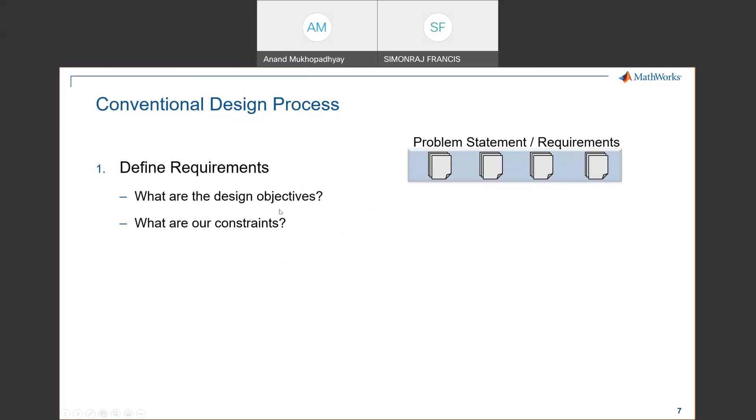Whenever we need to design a system, we need to understand the problem statement and the requirements. So we need to define those requirements: what are the design objectives and what are the constraints involved in that. That is the first step.

Once we know that, we have to identify for that system what are the different physical components required, whether it's a purely mechanical system, a purely electrical system, a control system, or a combination of all three, requiring embedded software as well. If it has to be deployed in some embedded hardware, it may need all four of these components.

So that has to be understood, and the problem has to be subdivided into electrical, control, and software, and finally it has to be integrated all together. This is known as system integration. The sub-modules are created, we have to integrate and test it, and only after proper test results can we finally deploy it, or make the system into actual hardware.

So obviously there are multiple challenges here. Whenever we are talking about the system, first of all, in the first stage, it is difficult to analyze or very easy to misinterpret. So understanding the problem statement itself is a challenge, and you need to understand it correctly. The clearer you are in the first step, the easier it will become in later steps. Otherwise, you have to come back and redefine the problem. So it is very important.

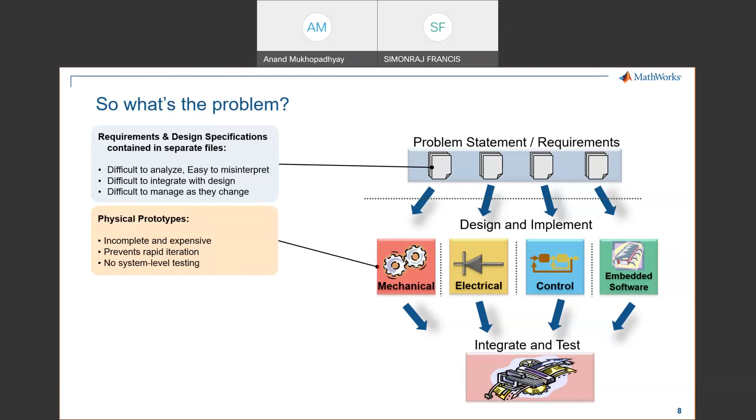If we are not clear, if the design is new, we don't know whether this will work or not. So building the things all together and testing it will need multiple iterations, so it will become obviously difficult.

And similarly, the manual coding aspect. Once you have designed your system, you have to put the system in the form of embedded software into some embedded device. So you need to understand or translate that design into that particular coding style, and that itself is time consuming. If that can be avoided, that is another good thing - how we can reduce this manual coding time, and which is reliable also. The coding should also be reliable, it is not that it is just generating a code which may not work. It could work better than the manual coding thing. So these are the things to consider.

And then coming to traditional testing. The first point mentioned here is that design and integration issues are found late, and it's difficult to feed insights back into the design process, and there's no traceability. This is a very common thing in industry. Once the design is made completely, you cannot simply sell it or terminate a product which is ready to be placed in the market, but you have to test or do test trials, and during that testing you will find multiple errors which need to be resolved before actually sending it as a product.

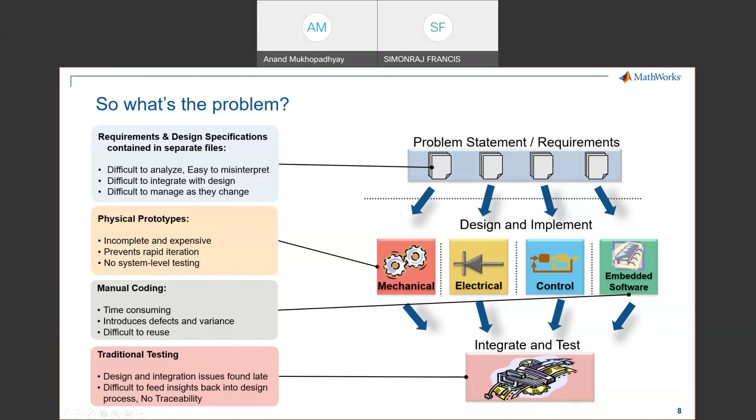Tracing the error will become challenging once the entire system is made. Maybe you are able to see the error, but what is the cause of that error? To detect that becomes a very challenging task. It can be in any of the stages from the beginning itself - whether there is some error in the mechanical part or in the control part or some misinterpretation from the problem statement to the design stage. So the cause can be anything. Understanding that itself is challenging, and once you understand that, you have to again go back and go through these steps, and check again where you may find some other problem. So this overall procedure is quite challenging and tedious.

That is why requirement errors are most expensive to fix during testing. Now in this graph you will be able to see what are the different phases of a project. First is the requirement phase, where we are listing down the requirements of a project or requirements of a system that is to be made. So suppose we have this amount of error.

In the requirement phase, we are able to identify the different errors introduced, and this shows the relative cost to fix that error at this first stage.

Now, if we go to the next stage, the design phase, we will have two kinds of errors: not only errors in this particular design phase, but pre-existing errors which may migrate to this phase as well. Now we have to fix both.

Now, if we see here, the amount of time or cost required to solve those requirement phase errors is much more compared to the errors arising in that particular phase.

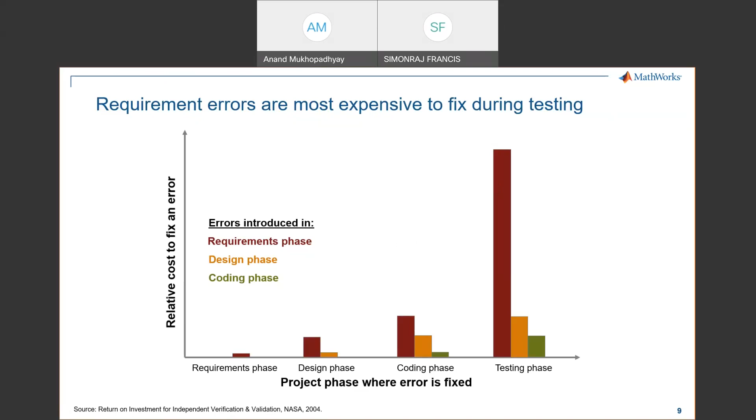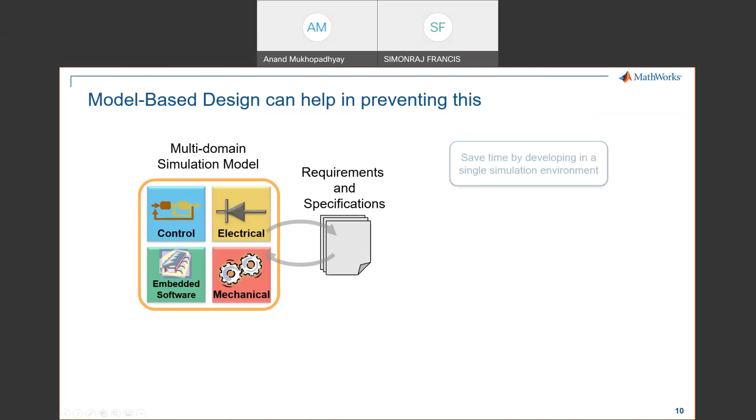Now, how can model-based design help in preventing this? In case of model-based design, you are able to save time by developing in a single simulation environment.

So by model-based design, what we mean here is that you are actually not making the system, but simulating the entire system inside the software. Here, correcting those errors is much easier compared to correcting errors while designing your system. So that is the concept here.

So once you have made the system, which needs different components and different physical aspects, and simulated the entire system, you can iterate it multiple times in the simulation software itself, and once it is giving good performance, then you go for the deployment aspect. That is the main concept here of model-based design.

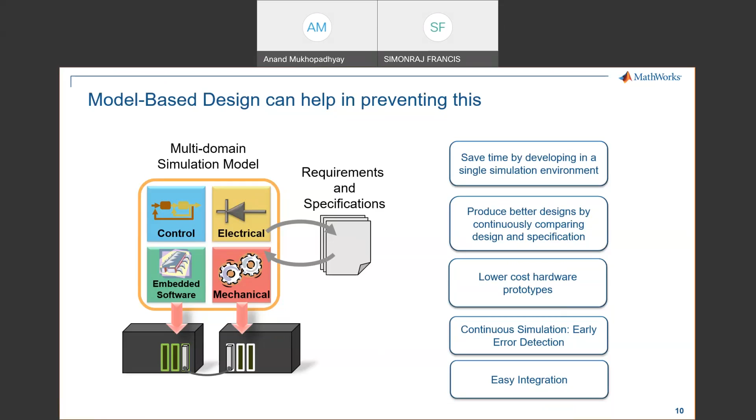One second. Yeah, sorry about that.

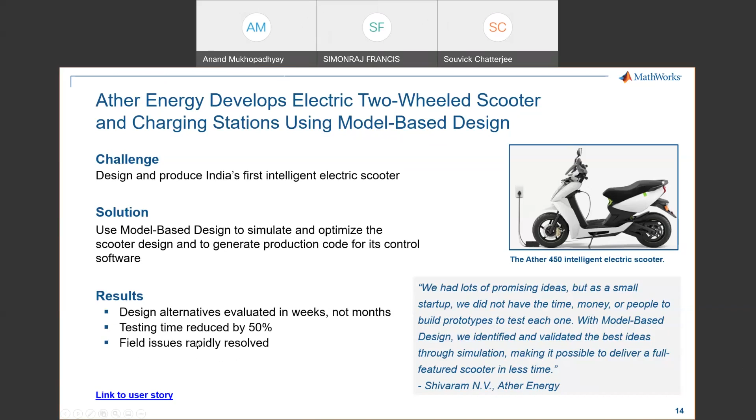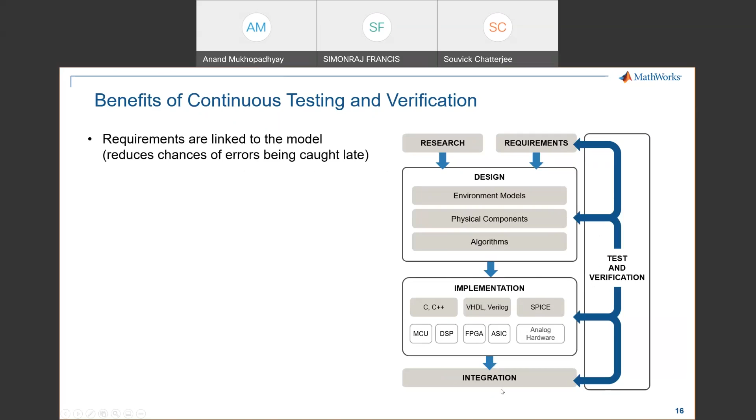So why were these industries successful? The benefits of continuous testing and verification. This is a similar workflow to what I covered in the previous slide. First is the requirement phase, then the design phase, then implementation, and then integration phase. The only difference here is these sub-modules showing what happens inside each phase, and all phases share a common element known as test and verification. After the first phase, second, third, or fourth phase, we have to test, verify, and find errors. If the errors are from a previous stage, we have to go back, and this is how we keep iterating before final deployment.

We have domain-specific details added to refine the model, and intellectual property and engineering data reused from existing designs and CAE tools, computer-aided engineering tools. In the design phase, we have different environment models, different physical components, and algorithms involved. We need to design those sub-modules, whether related to mechanical, electrical, controls, or some other domain, and combine whatever algorithms are required all together. This is a very important stage, the second stage, the design stage.

Coming to the implementation stage, when we have the design ready, we have to understand what kind of hardware is needed - it could be a microcontroller unit, a DSP processor, FPGA or ASIC device, or analog hardware. Each different hardware is compatible with different kinds of code: microcontroller and DSP are compatible with C++, FPGA and ASIC are compatible with HDL, VHDL or Verilog code. Similarly, analog hardware uses SPICE-based coding. So the block diagram based system has to be converted to that, then we can deploy it into the hardware and do the integration part.

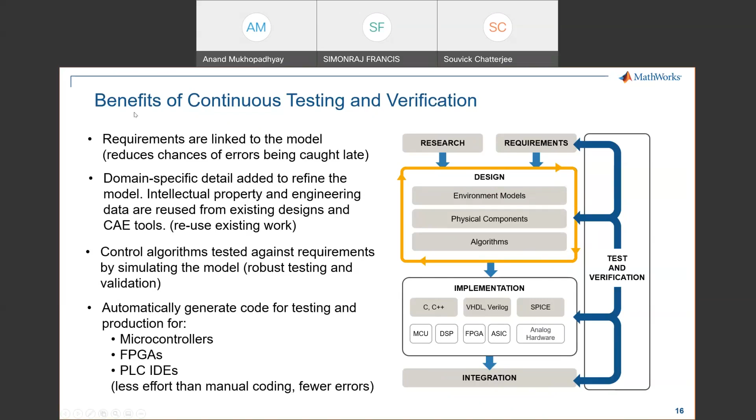This saves a lot of time in manual coding as well. In this phase also we have less effort than manual coding, because it is done mostly by the tool, and there are fewer errors in the workflow. Even after the implementation stage, we can always go back and redo the process, just by changing some blocks after finding errors, and rerunning the code generation phase and integrating it again. Overall, it will save a lot of time for test verification as well. These are the general benefits of continuous testing and verification.

Now I will start with some simple demo, and I see Souvick has also joined. After a while, I will also ask him to cover some of the demos related to Simulink to get started. So this is a basic session.

Let me open the Matlab window. Calculus blocks - let me open this one. I hope my Matlab window is visible to all. Yes, visible. Okay, thank you. So this is an example to show how we can use Simulink for some simple mathematical operations like differentiation or integration.

This is a Simulink environment where let me show you from the Matlab window itself. Inside the Matlab window, we have this Simulink block. If we go here, another dialog box will open up, from where we can create a blank model, or there are some specific block sets or toolboxes related to those domains. We can start with those as well, but for now let me just show you.

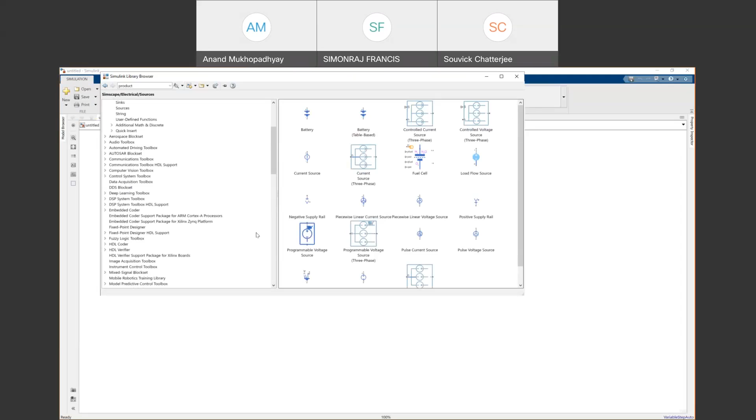If you open a blank model, you will get a blank template kind of thing, and you have this library browser. Inside the library browser, you have multiple sections like Simulink, or similar to that shown earlier, like aerospace block sets - blocks related to aerospace would be found here, blocks related to DSP would be found here. So similarly, it is divided.

Also, we have a special section here known as Simscape, we'll get into that as well, which is used to simulate different physical components like electrical, fluids, or multi-body - a bit advanced topic for now, but these things can be done here apart from the foundation library. Inside the foundation library you can find the subgroups as listed here, and you'll find related components - electrical components will be found inside this section, and the different sensors - whether we need a voltage sensor and current sensor, or what are the different sources, if it's a voltage source, AC current source, or whatever sources may be.

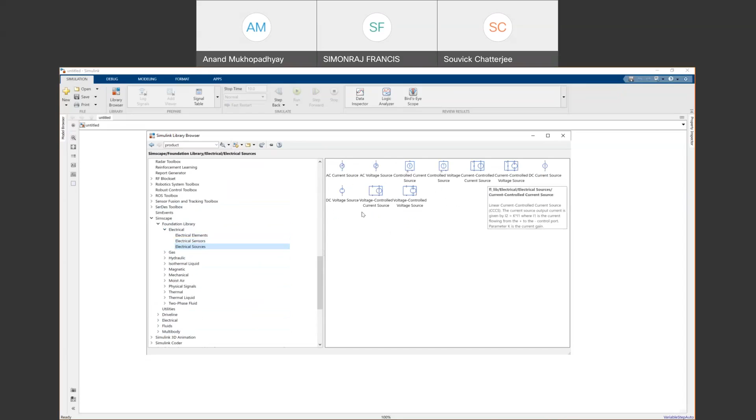So those will be found here. Similarly, inside mechanical you will have these subblocks where you can find these things. Okay, and you have to just connect those blocks to make the design.

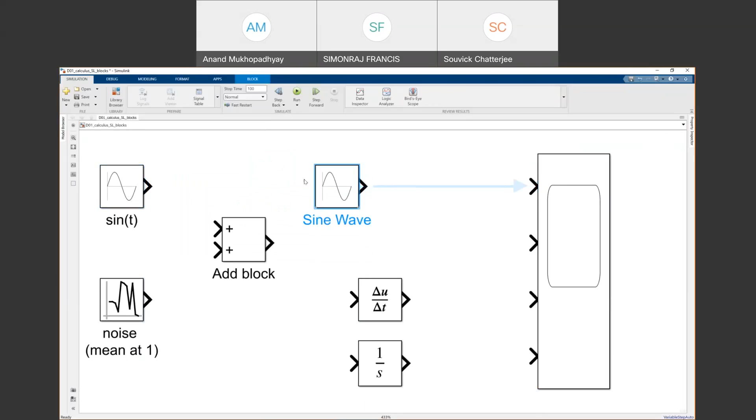Now coming back to that simple example, here we have taken a sine wave. You can see, if I click in this block, this is a sine wave. Also the block name here, and you can click on it to get the block here, or else you can go to the library browser, and since it is a kind of source, you have to go to sources and see what kind of sources are available.

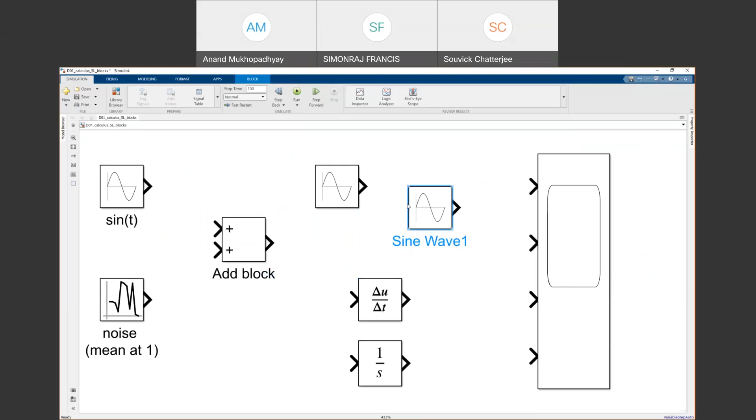So there are multiple things available, out of which, suppose this is the sine wave, so I can either drag and drop, or I can also double click or right click and add it to the environment. Right click and add it to here. So these are multiple ways we can add these blocks.

So now I have 2 more sine waves which I actually don't require. Once you have this block, you have to double click and see what are different properties and set here. For instance, a sine wave will have some kind of amplitude and frequency. Also, phase and bias are also there with a sampling time. So as of now, we can see here the amplitude and frequency time is set. We are not providing anything else.

So if we don't provide any sample time here, then it will interpret the sample time from the other blocks which are connected. For instance, this is another block known as noise, which is actually a random number generator. Basically, if I type random, then I will get the second one, the random number generator.

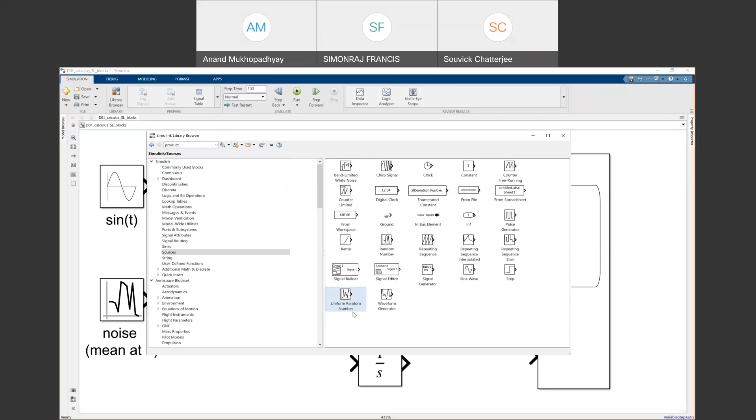So this is one way when you know the name of the block. If you don't know the name of the block, then similarly you have to just find out the correct category for it. Like it will be under sources, and under sources you have to find, suppose this is the random generator, so this is the same block. Or if you want some other block like uniform random generator, you can do that, which will have some differences as mentioned in each of those blocks.

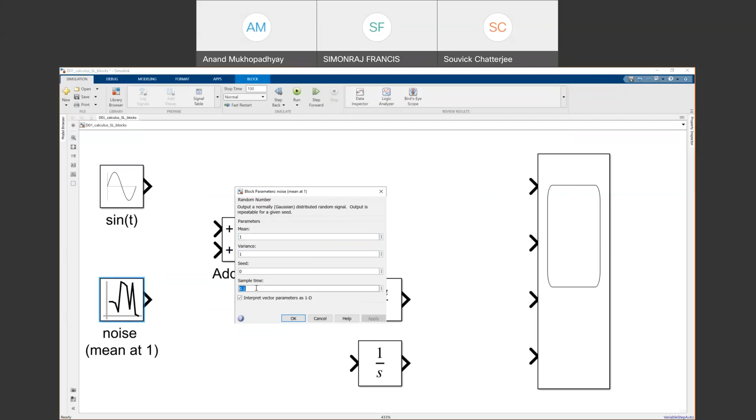So you have to just go to the block and read what kind of thing it performs. It will output a normally Gaussian distributed random signal, and the output is repeatable for a given seed. We have the mean and variance. Whenever we are generating some Gaussian distribution, there will be variance, standard deviation. So mean 1, variance 1 is fixed with a sampling time of 0.1.

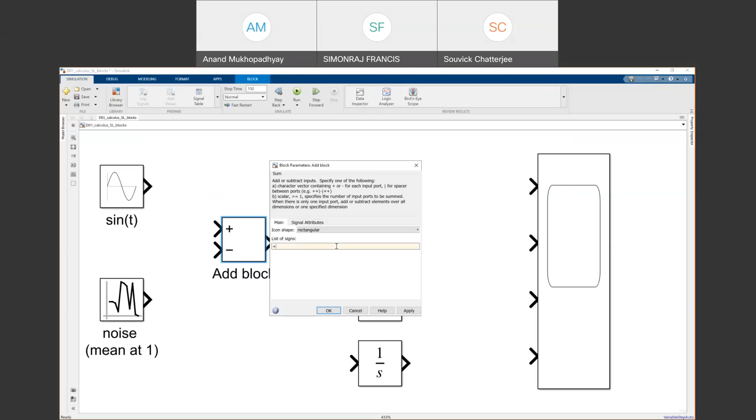Next is an add block. This is an adder block where we have put 2 signals to add, so that we can also make it a subtractor block just by changing the signs here.

And now we have this derivative block, which will do the differentiation. It's a numerical derivative, du dt. So with respect to time, it will derivate the signal.

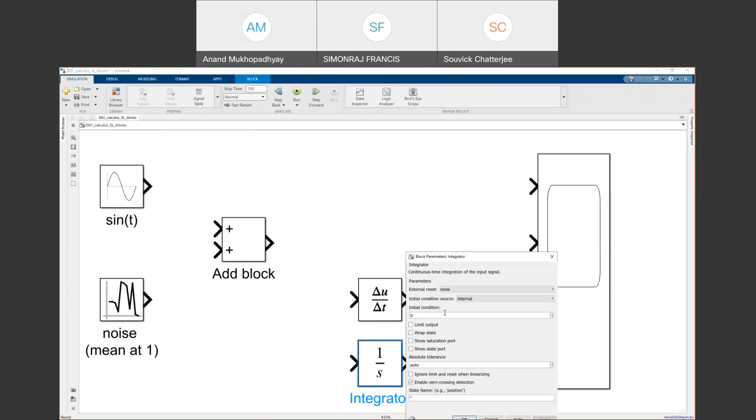And we have this integrator block as well. There are settings associated with it as well, and it will do the integration of that particular signal.

So now we have the blocks ready. The final block I just didn't mention is a scope, similar to the input portion. Here we want to see the output waveform into some kind of oscilloscope, so that is what this block is doing.

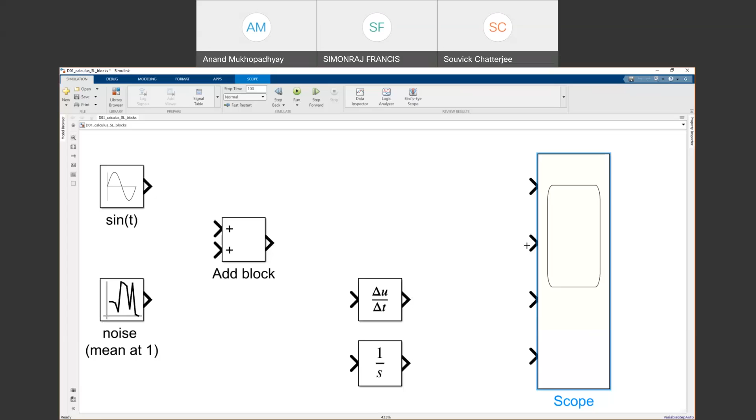So if I double click on this block, you will be able to see the output waveform window, where we can see those waveforms. There are four windows here, because there are four inputs mentioned here.

Now let me connect these blocks. I'm just connecting the input to the add block, that will add the sinusoidal wave and the noise together, and we will have a resultant wave here.

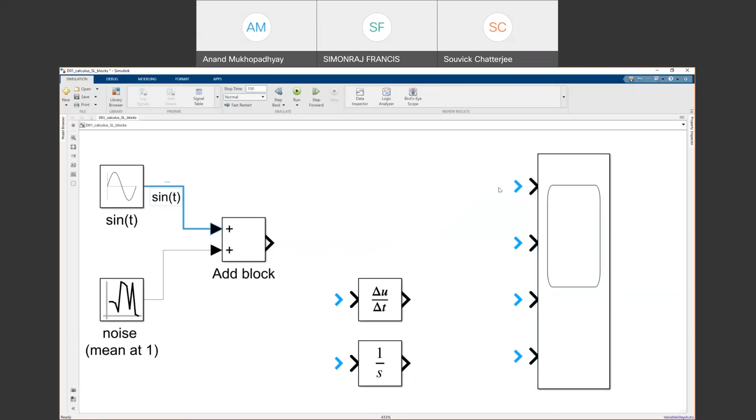So maybe I can simply connect the sine wave here, connect the noisy sine wave here. And send this noisy sine wave to this derivative block, and I want to see the result after derivation, what happens to that noisy sine wave. Similarly, sending it to an integrator, and I want to see the result after integration of that sine wave.

Having connected the blocks, I can use this simulate model icon, which is also the run icon. I'm just simulating it, or I can also type Control T. It will do the same thing.

After simulating this till 100 seconds, I can see the x-axis from 0 to 100, and these are the four waves. The first one is the sinusoidal wave, and the second is the noisy sine wave. After addition of that random number generator and after differentiation, we see this is the response of the wave, and after integration, the response is something like this. So this is one way to visualize it.

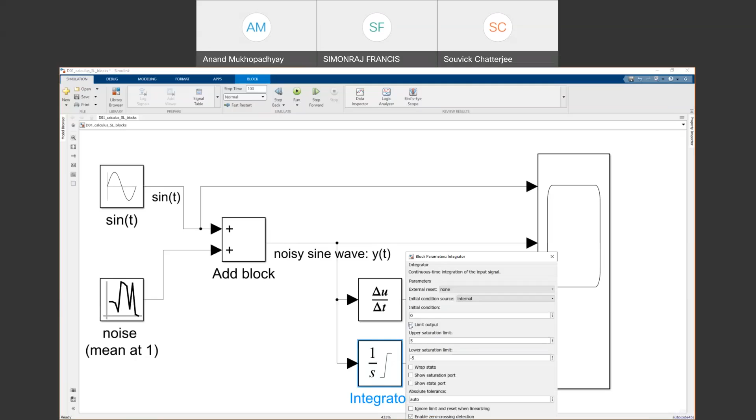Now there is a different symbol also here. Once I put this limit in that integration, but once I remove it, it is just the 1/s operator used in the Laplace domain. Now you see it is integrating, but the magnitude is increasing. It is integrating all the signals starting from 0 over time.

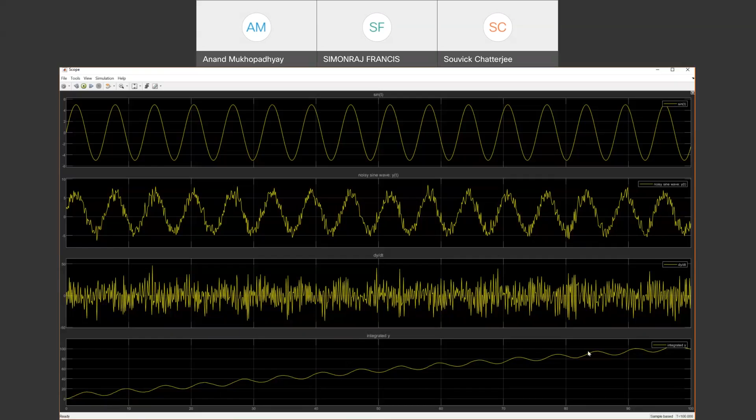The x-axis is the time axis. One thing I didn't mention is there are multiple solvers behind Simulink, so how is it solving with respect to time? This one has chosen the ODE45 solver. If I open the solver settings, I can see there are different ways to select the solver, either variable step or fixed step. For now we have chosen variable step, and inside variable step we have chosen automatic solver selection, so the simulation tool decides whichever solver is best for the problem. In this case it chose ODE45 in the background.

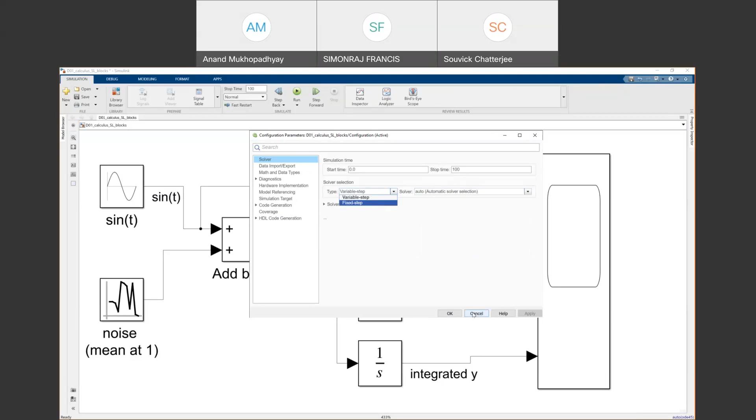There are other solvers as well, but this setting can also be found from here, which is very important to know. From the modeling section, you have to go to model settings, where you can make those changes as well. So does that answer your question?

Anand sir, actually the 1/s, is it the Laplace transform of a function f(t) equal to 1? What is the relation here? You have mentioned du/dt for derivative, which means you are doing differentiation of this sine wave, and that corresponding change is impacted here. Here you are taking the Laplace transformation of sine t, but the Laplace transformation of sine t is 1/(s squared plus 1) actually. What do you mean by 1/s here?

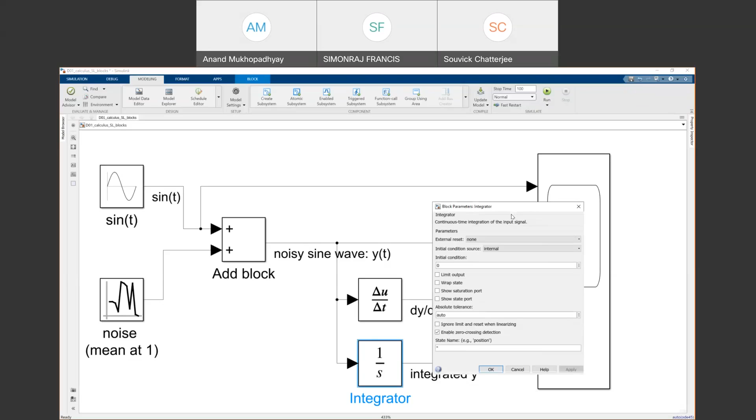Here actually the function is if f is 1, then this is the corresponding transform. If you take a function sine t, then the corresponding Laplace transform is 1/(s squared plus 1). This 1/s symbol is just representing its Laplace transform, or it takes the corresponding Laplace transform of sine t.

So this 1 by s, this is actually an integrator block, denoted with this 1 by s thing. Maybe it may be an integration of sine t. Let me explain it this way. Inside this continuous block domain, we have different mathematical operations we can perform, right? One is this derivative and one is this integrator. So I'm using this integrator block, which is also denoted by 1 by s, and usually in Laplace domain we see this transfer function written with this term s. So it is actually integrating it with respect to time, and then we are plotting it with respect to time. That is being done here.

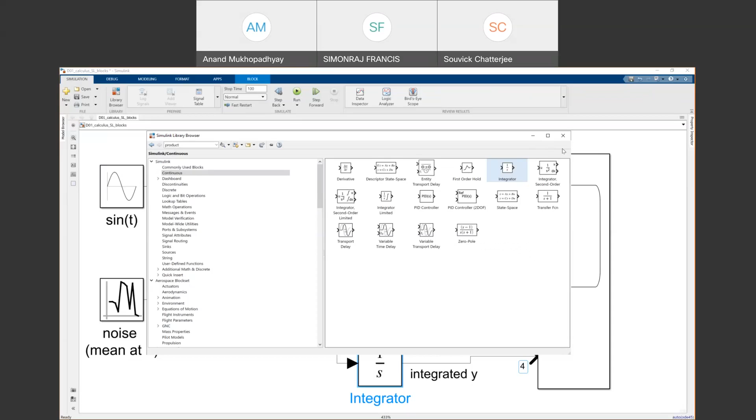Okay, sir. Okay, thank you. Okay, thank you, sir.

So now let me go to the second demo. So now in the second demo, we already have the blocks which we require.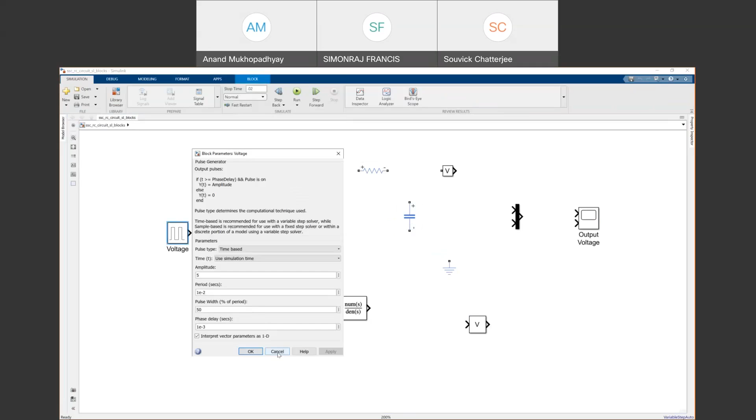We will be going through an RC circuit, and we will try to simulate it using the Simulink blocks, with the mathematical blocks available, and also using physical components like resistor and capacitor available in the Simscape block. We have these blocks already taken from the library like pulse generator, a voltage source made of this controlled voltage source, and a solver configuration.

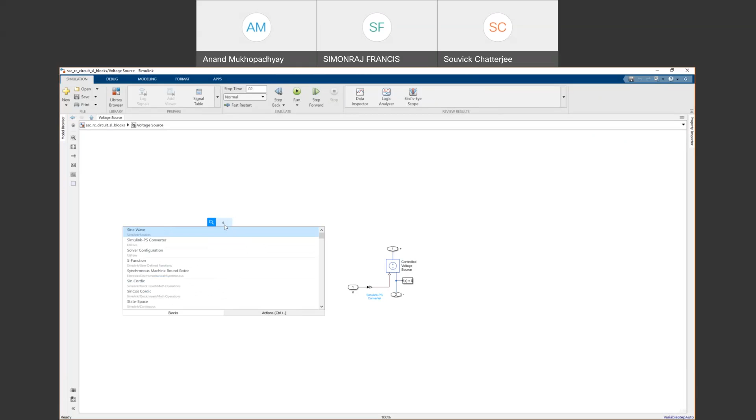So these are things which have to be mentioned. We are dealing with Simscape. So whenever we are connecting Simulink and the Simscape block, we need these kind of connectors known as PS to Simulink to PS converter. So Simulink to PS converter is one, another is PS to Simulink - physical system to Simulink converter and Simulink to physical system converter. So this is what is used here. This is a Simulink block, and we want to convert it, so they're using this.

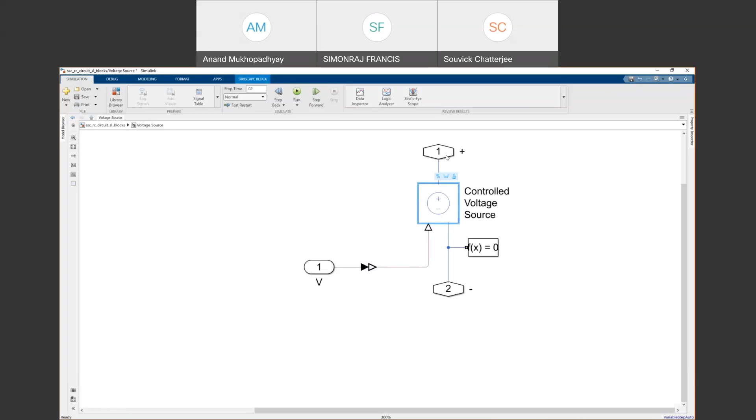Let me just zoom it a bit. We are using the Simulink to PS converter, then we are in this block. This is from the physical domain, from the electrical sources section that I had shown earlier, and similarly these are the ports from the Simscape block. So this is a connection that is required, so you have to just remember this important thing. The rest of the things are more or less okay.

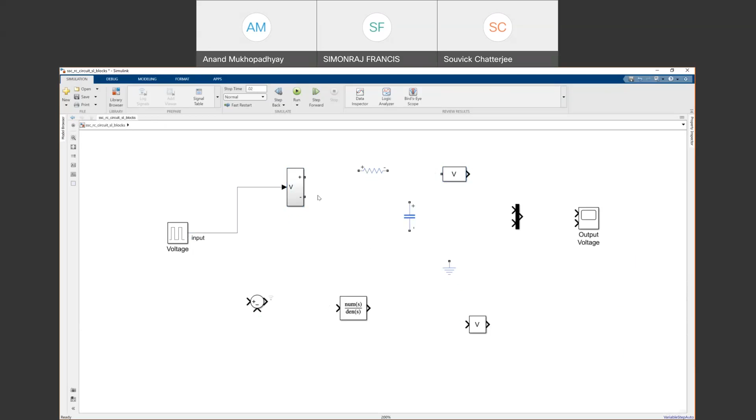Now, for making the connection, let me make it quick because we may run out of time. Let me just quickly connect it. I'm connecting this voltage source to this resistor, and then connecting this resistor to this capacitor, and there is this ground component which is the electrical reference. So even if you are using some other component, you will need this reference. This is important, and I want to complete the circuit. So I'm using the negative port - here we have these two positive and negative ports as you have seen earlier, assigned with these numbers.

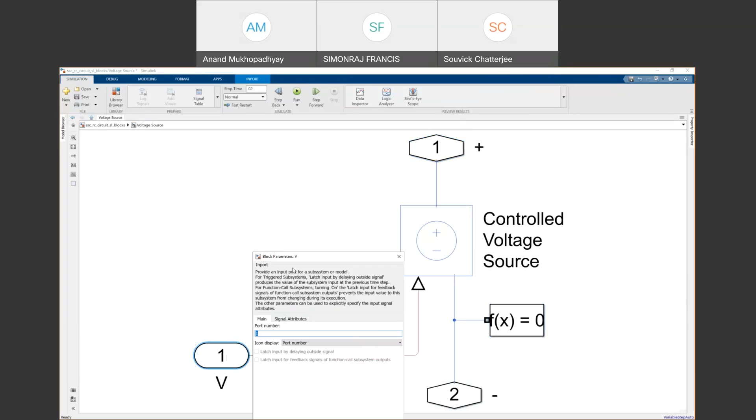PMC port - physical modeling connection port, again related to Simscape. So these three blocks are related to Simscape, which will need the solver configuration, and to connect it use a convert block with a Simulink port. So this is a normal port, in port Simulink. This is the details of this voltage source.

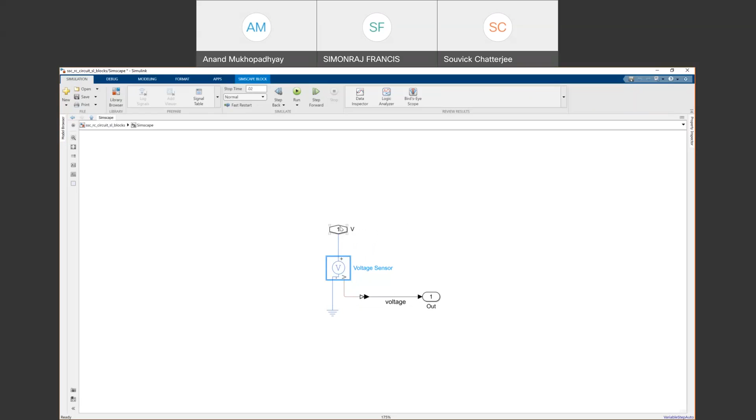I just went inside it, and now I'm back just to show you how we are connecting this Simulink with the physical components. Second, I can connect it to this voltage sensor. This time we need to sense the voltage, for that we need a kind of sensor which is again a physical component taken from Simscape. In a similar manner, we are just connecting, completing the sensor terminals with the reference as well as the ports with a physical PS to Simulink block to the output port. That's it, so now we can use this sensor and connect it further.

Here we are using a MUX. I will tell you why we are using a mux - we want to compare the result of the Simscape with the result of Simulink. We have not made the RC circuit using Simulink yet, but we can do it in this manner. So let me just connect it here, and I'm connecting it here, and I'm connecting it here.

Now here we have this transfer function block. Inside the transfer function, you have to mention the actual transfer function based on the numerator and denominator coefficients. Because this is an RC circuit, if you solve V naught by Vi, the numerator will have 1, and the denominator will have the RC term associated with S.

You have to mention these terms where the first term corresponds to S to the highest power. So here RCS will be the term in the denominator, so you write RC. Then we don't have any other term, so we mention 1. That's it - mentioning that transfer function and connecting it to the output port.

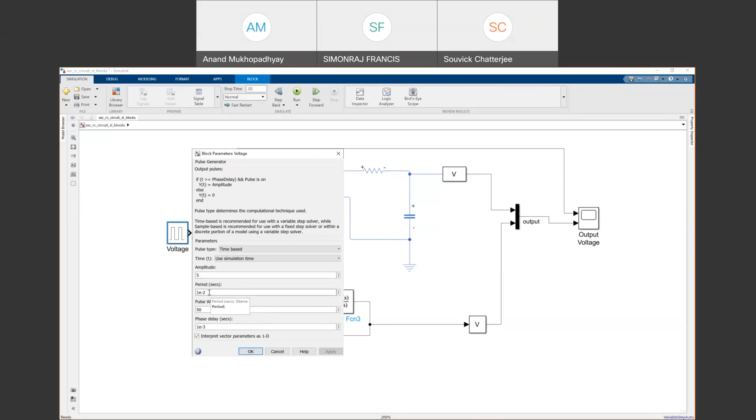So I'm connecting it to the input, where this time the input is a pulse generator, having a pulse width of 50% and equal time period. These are the amplitude and other settings like the time period of pulse and the phase delay. That's it.

What does the RC circuit do? It is charging whenever it gets a higher pulse. When the voltage is reduced, it is discharging again. So charging and discharging based on the time constant, which depends on the R and C value. Now you must be asking, we didn't define R and C value anywhere, right?

That you need to define either before running this program in the MATLAB window, or again as I mentioned, in this modeling part. Here we have modeling properties where you can go to the callback section and mention those MATLAB commands, like R and C values - R equals to some ohm and C equals to 100 microfarad. If you mention this, whenever you are loading the file, it will automatically run R and C in the background, and it will be loaded here. Otherwise, you will just get an error asking you to mention the value of R and C.

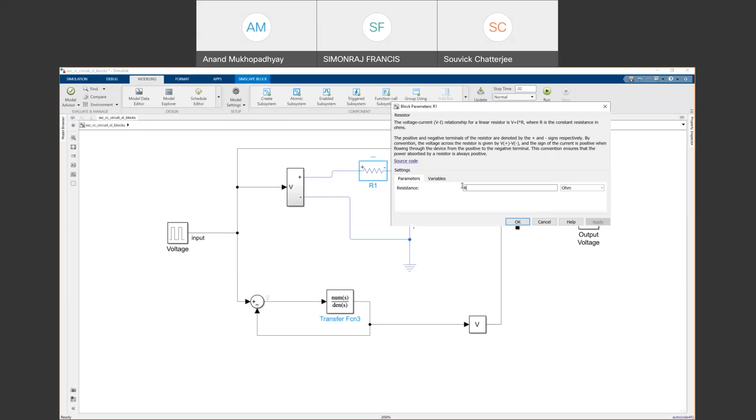And why R? Because the variable here is named R. If you change the name here, you have to assign it to that particular variable. So this is how you can build a particular circuit using Simscape and Simulink in the electrical domain.

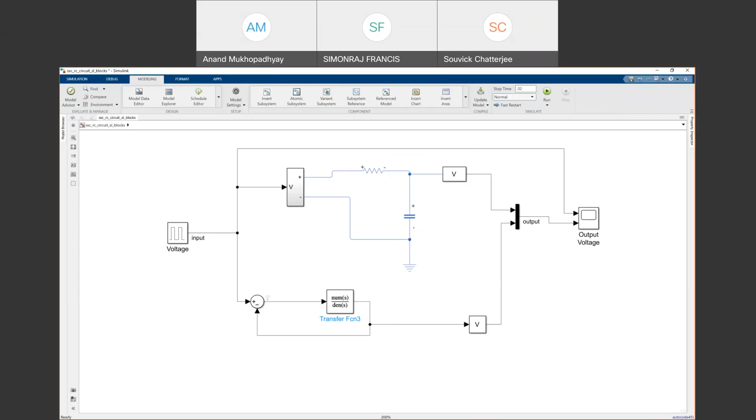Let me go back to the slide, and let me briefly do another thing about Simulink. When you are dealing with multiple hardware, you would need to install some of the support packages related to those hardware devices. For that you have to use this add-on section.

Whenever you are working with some hardware, for instance, if you are working with your mobile phone and want to connect your Android device and do some kind of experimentation with the Simulink environment, you have to install the support package for the Android device, from this add-on section. Then you can do multiple things.

Here you can go through these links to get through these examples to get started, where we are using the blocks from the Android section in the library. So this is a camera block and this is the display block, which will read the data from your camera, which is your mobile hardware, and send it back from the Simulink environment, back to the display.

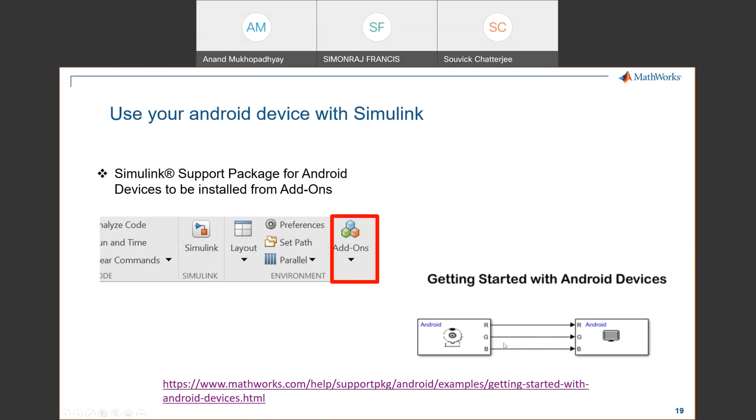So here we are not doing any operation - it is a straightforward thing just to test that you have installed it correctly. After that, you can do multiple experiments. One such experiment is shown here, where you have made some computation in between.

What is the computation? It is very simple. This camera, which is capturing the video in real time, will have red, green, and blue components. We are sending those components, and we are also sending a 255 number.

So if you know about images, you know images are pictures which vary from 0 to 255 if it is in uint8 format. So we are just subtracting 255 with this value, and this kind of operation will actually invert it.

So if you are capturing something of black color, after this operation you will see it as white color. This operation takes place inside the Simulink environment, and then sends it back to your hardware device. For that, you just select deploy to hardware, and you will be able to see it.

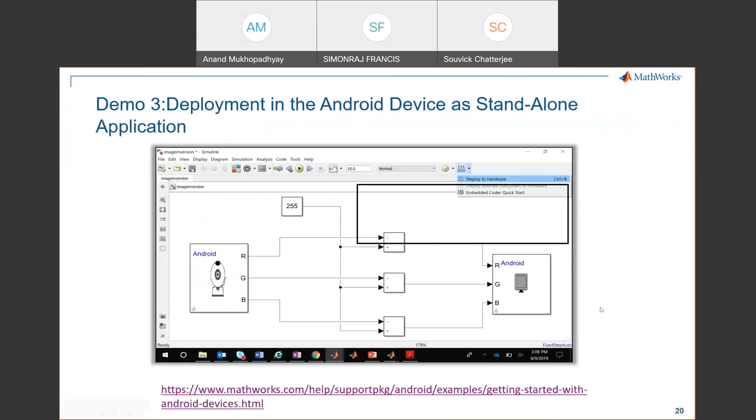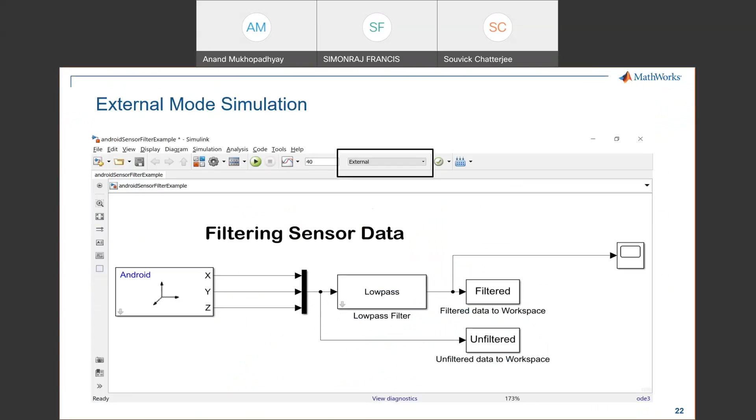At a later stage, but now I will go back to the slides. So these are different filtering examples you can do, because your Android device also has sensors apart from your camera. So you have your accelerometer, the gyroscope, so you can capture data, do some filtering process, and see the results as well. That is where you can make use of Matlab mobile in your work.

Installing the Matlab mobile app to do certain things along with Simulink. So this is an example where you see in real time how the data is being captured and filtered.

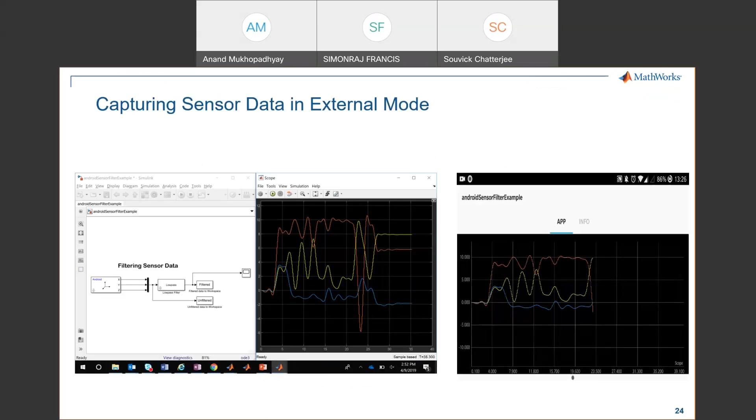So you start with something simple, get comfortable with the interface, and you can explore multiple cool projects using your mobile and Simulink environment.

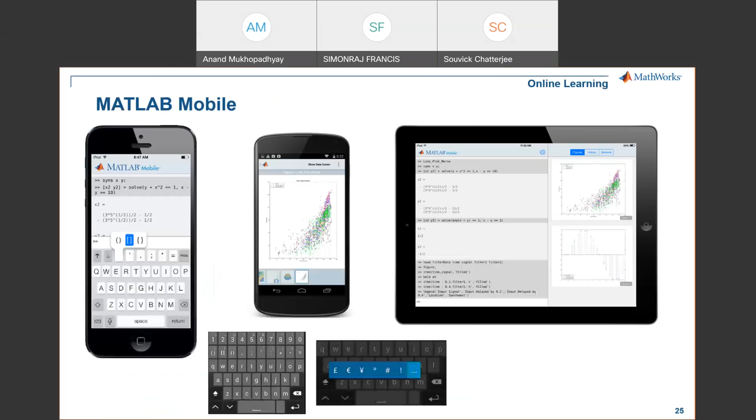Now I will ask Souvick to continue with the presentation. Again, more time than I thought I would, but...

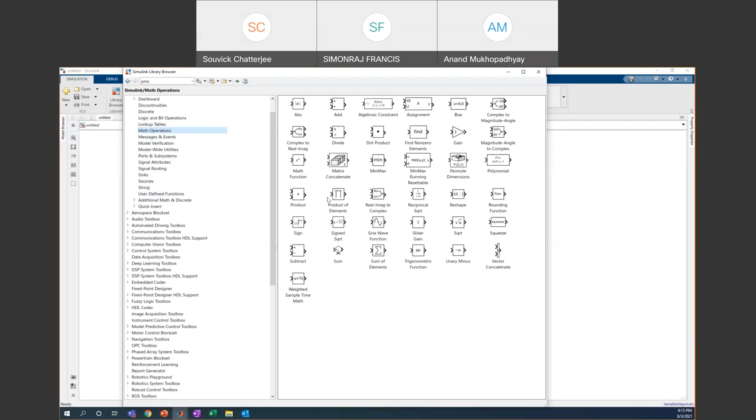Now once we go down here, of course we can create our own block as well. You've seen a lot of different things in Matlab. Using the user-defined function blocks, we can create a custom block based on a Matlab code.

Now if we go down here gradually, you'll see there is an aerospace block set. This is primarily for the area of aerodynamics. For example, if we have to do an airfoil simulation where we give all these different inputs - all the blocks operate in the same way, with some inputs and some outputs. Here the aerodynamic forces and moments are for the DATCOM ones, and like this it goes on. Of course, as a starting point, going to the aerospace block set is not advisable, because it contains a little more complicated and multiple different parameters. We'll talk about some very simple ones to get started.

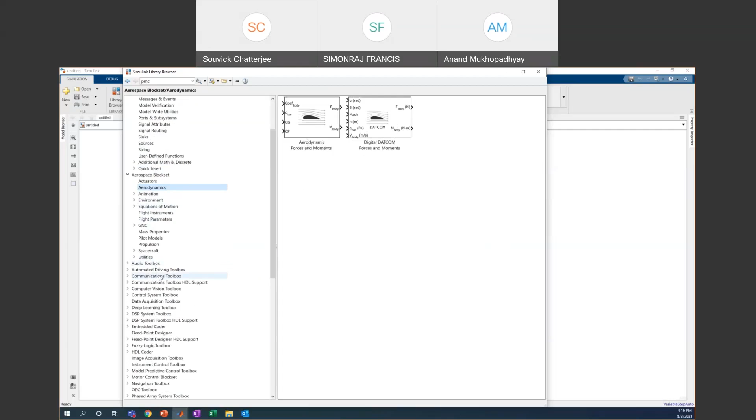Now there is audio, automated driving, communication - once we go down here you'll see a lot of different things, so that's how this is structured. Then we go to robotics, and at the end there is something called Simscape as well. Now if you go to Simscape, inside the foundation lab...

Souvik, I just have one question in the chat. It's a bit advanced question, but I thought to mention it now. The professor is asking how to effectively import CAD models from SolidWorks or other CAD software, related to multi-body mechatronics department. Absolutely, thanks for that question, that is a very valid one. I'll come to that in 10, 15 minutes maybe.

Sure, so now looking into the Simscape Foundation library - multibody will come just after this. Here we see that there are components like this, electrical elements. If I go inside, electrical capacitor, so all different types of electrical elements. Now these are physical components, these are not mathematical elements. Mathematical means earlier we saw the integrator block, we saw the addition operation - these are not like that.

These are all physical components, and some of these Anand also talked about when he discussed the RLC circuit. Then we go to gas, similarly hydraulic, isothermal, liquid - like this it goes on.

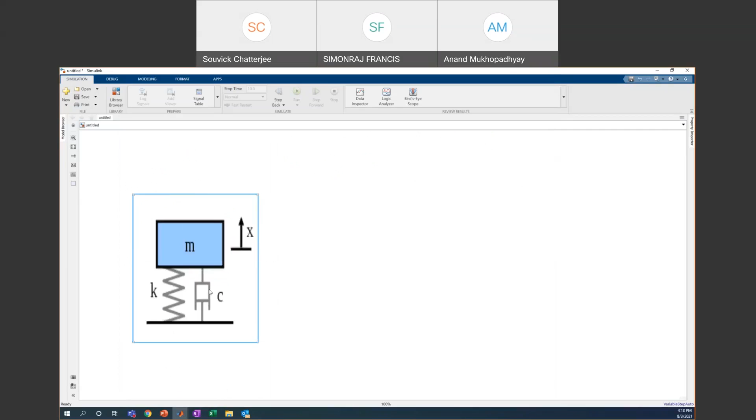Now how do we do these things? These are very simple - here we basically don't go to the equation at all, we basically model the system we want to model. For example, aerospace, mechanical, electrical, everybody probably can relate to this - say for example if we have to model something like a mass spring damper. Everybody probably knows it's a very simple system; if you have to model this mathematically, it's a second order differential equation.

We've talked about how to solve ODEs using numerical and analytical techniques. But if we don't want to go that route of solving the equation directly, we can instead solve the system in a physical way.

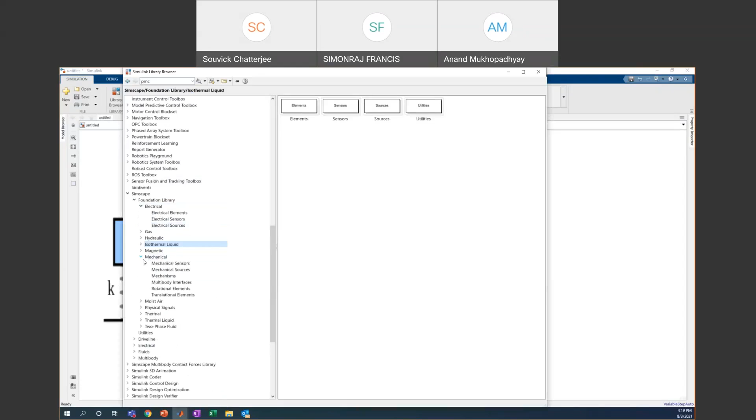So if I search here in Simulink, or go to the library browser, under foundation elements, then mechanical, then mechanical translation elements, you can see mass is here. I can just drag this mass here, and mass comes up.

Similarly, apart from mass, we can also get something like a spring. If I search spring here, we get a translational spring. And then we can also get a damper, which becomes a translational damper.

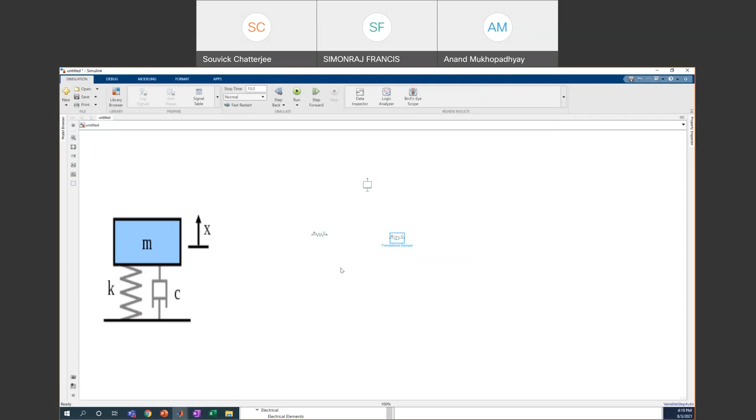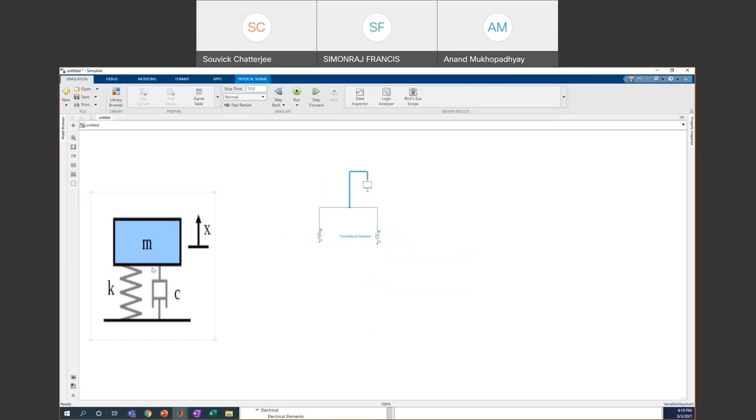Now the way we connect things here is exactly like the way we connect in the physical world. I'll rotate this for now using Control R, the shortcut for rotating, and then connect it, just like drawing a free body diagram: mass, spring, and damper in parallel, connected to a reference.

I'm making it a little bigger so we can see it easily. Let me shake this into place, and now this is there. So this is there. Now we need to connect this to a reference.

I'll search for a reference, called a mechanical reference, so mechanical translational reference. If you have rotational elements, you can use rotational reference. If you have electrical elements, you can use electrical reference. So that's about it.

Whenever we do things this way, we need a solver configuration block, because that's where we give the solver settings. That's about it. Now we can solve this problem, or rather, we are ready to solve it.

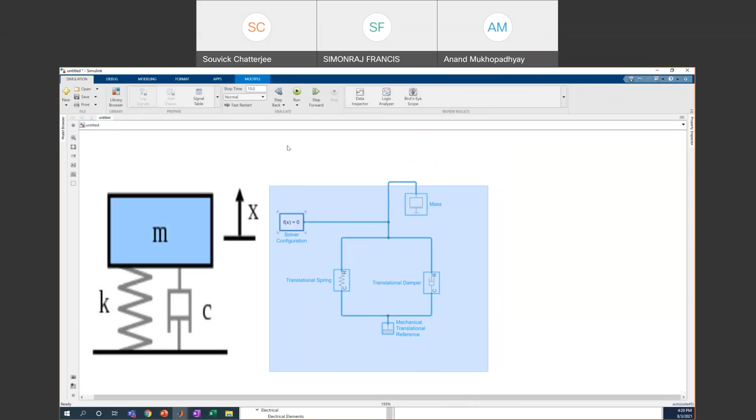If I run this, it will compile and run, but we won't see any output. The reason is, if you recall what Anand was talking about, there's the scope block by which we see things, right?

So we can get a scope like this. All right, so this is the scope. But if you see here, you won't be able to connect it anywhere, because these are all physical signals, not mathematical variables.

These are physical symbols, so what we need to do is get a sensor here, because we need to sense the motion. So we'll search for a motion sensor, which is like an ideal translational motion sensor.

If you double click here, you'll see the details of the block and get the source code. It shows that R basically senses the motion, and C is for another motion if you have, say, a double mass spring damper. So that way we can have just one more. We can copy paste and create one more.

We don't have to solve anything very complicated. For now, making things simple, I don't have anything else, so I'm just adding a reference here. This V stands for velocity, P stands for position.

So this sensor actually senses things, like doing an experiment virtually. Instead of putting physical sensors, we are putting virtual sensors, and this sensor essentially gives us the velocity and position.

The other thing we need to do, as Anand talked about, is convert this physical signal to a Simulink signal. So we connect the velocity to this converter and then to the scope. This is for the velocity.

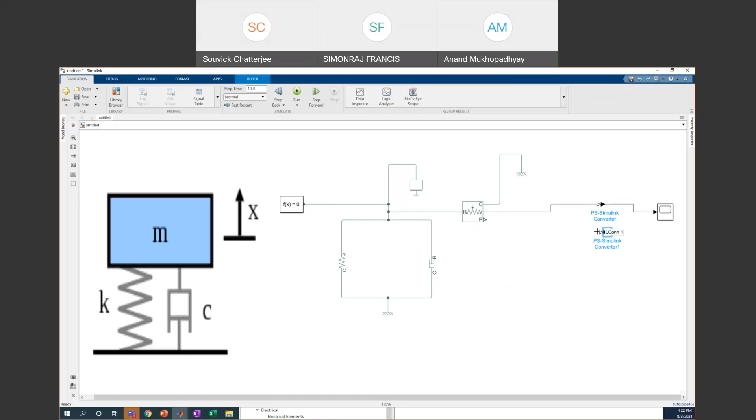Similarly, we can get one more of this. Control C, not this—so maybe like this, and then create a copy of it, connect to the position, and then connect to the scope.

The other thing is, if you recall what we do in a differential equation: if it's a second order differential equation, we need two boundary conditions, or rather two initial conditions, if it's a time dependent solver. Having said that, one important thing is Simulink is always a time-based solver.

So we need to give a time here always. This is a time-based solver, so we are solving for velocity and position. We need to give the initial conditions.

If you go to the spring now, you will see this is a spring constant, and these are also dimensions. In the variables there are the initial velocity and initial position. So instead of giving that initial condition, we are giving the initial deformation and initial velocity as the beginning values.

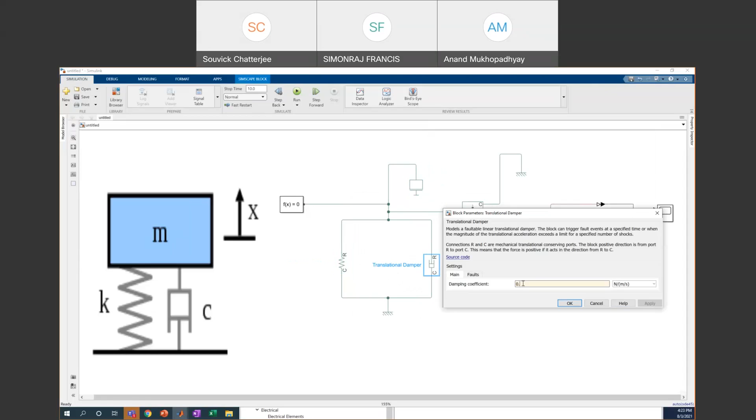The mass we can double click and give some values. The damper also you can give some values, whatever we want. We give the values and that's about it, then we can run this. Once we run it, you can go to the scope and this will give you the plot.

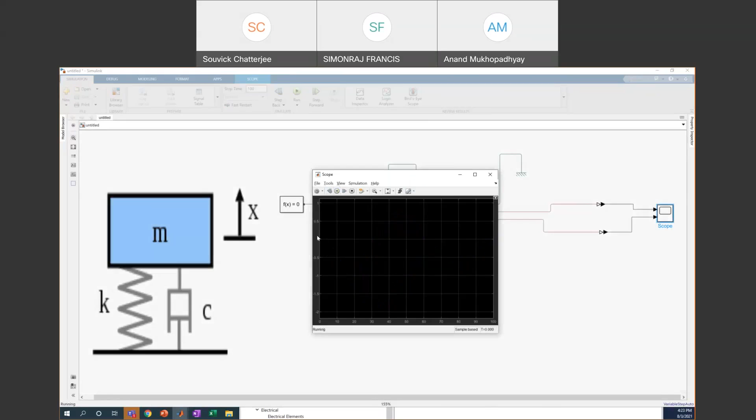Once this scope comes up, you can see that the plot is there. If I want to solve it for a longer duration, I can give it 100 and run from here as well. So then you will see this has come up, showing velocity and position.

One thing to notice here, this is not looking smooth, right? So for that we need to change some settings, which we can click here. Also, if you look here, this is an ODE45 being used for solving. ODE45 means ordinary differential equation, and 45 means fourth order solver with fifth order error.

So if I click on this gear looking icon, we can change settings here, like which solver we want to use and whether it's a variable solver. These are what Anand already showed. So inside the solver details, we can give all these settings.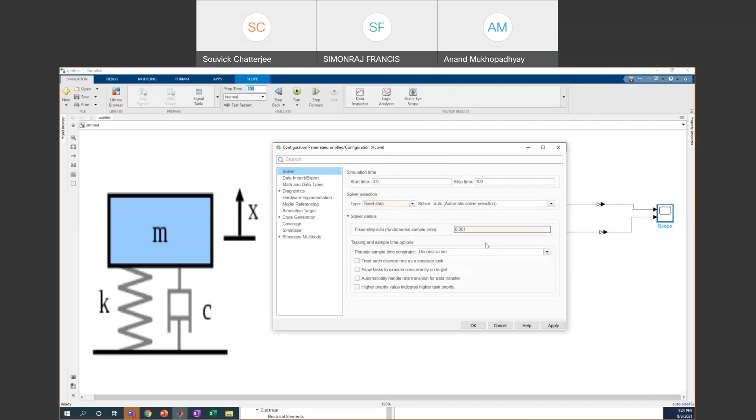So if I go for fixed step and then reduce the step size, something like this, because I want to make the curve smooth, right? We need to reduce the step size. If you do that and run this again, you can see that the curve has become smoother because we have made the time steps finer.

So that's about it, this is how you can do this type of simulation. Now the advantage is if you have a double mass spring damper, what you can do is just copy paste this and another one will be created like this. So we don't have to solve too many complicated equations once the system is scaling up.

If we have an automobile, an entire car, it becomes difficult to have equations for every part. But if we can do it this way, then things become easier.

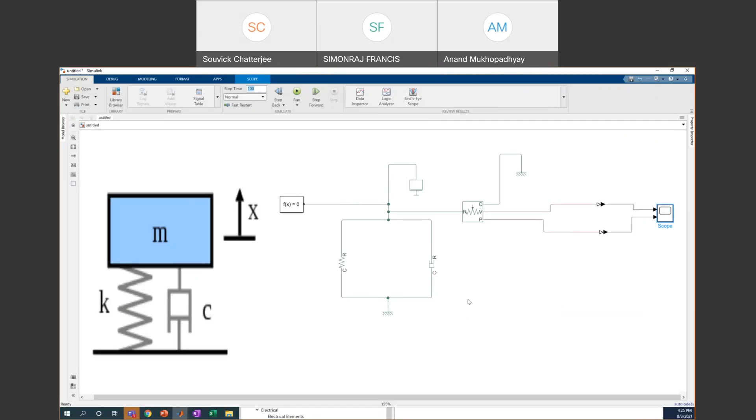In the physical modeling approach, we can go to a bunch of different things. If you look into this library browser, there is also this aspect of multibody. Since the multibody question came up, inside multibody there are belts and cables, body elements, different types of joints. If you're doing robotics applications or something like that, these types of joints become very useful. There are different types of gears and couplings as well.

So bevel gears, all these things are there in aerospace, automobile, electrical, mechanical, and so on. So these physical blocks exist. Now it depends on us how we want to connect them to create our system to do something.

So now this multibody part, I'll just talk about this multibody part, and then maybe talk about the question. For the multibody part, maybe I can show you from the example. If you search here SimScape multibody, multibody is basically for multibody simulations, for physical simulations like robotics.

It can be all different types of things. Once we go to SimScape multibody, you will see that in the examples area there are a bunch of different examples, and these are pretty nice in the form of giving nice visualizations as well. I'll show a couple of them maybe.

So you can see that here we can create simple pendulums or double pendulums. We can do robots, and yeah, this is still loading, but once this comes up, there are all these different types of examples, which work pretty well.

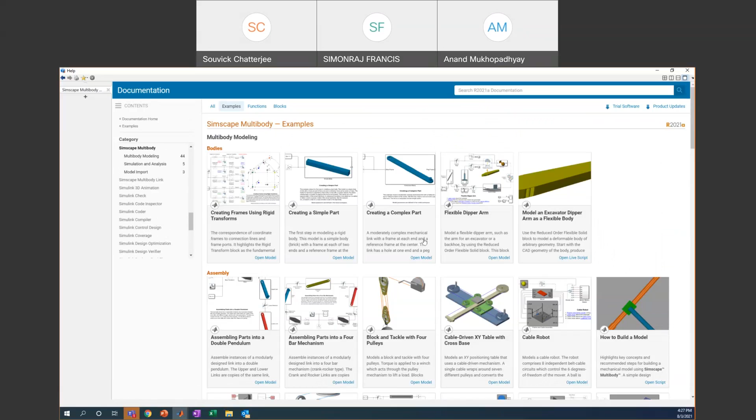I'll probably open up one of them to show how this looks like. So say for example, it can start from something very simple and can go into as complicated as we want. It can go to something like pendulums, to a single link, to more complicated stuff, like this gear or this robot.

So I'll just open this model. This is if there is a robot which needs to be moved in a specific way, specific hand and manipulator, we can use this. Sorry, not this one, this we just created.

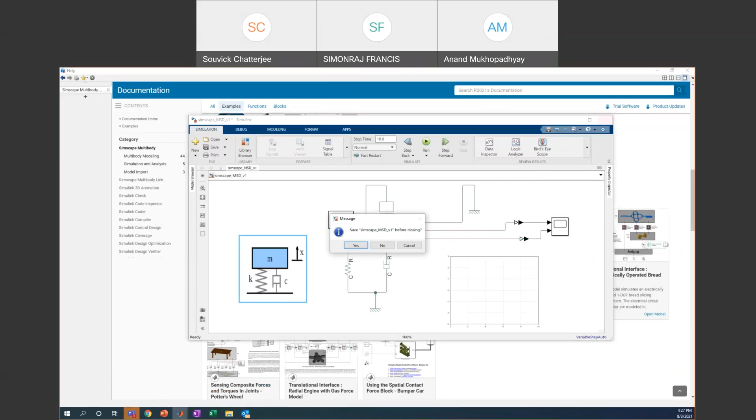So if I run this now, you can see how it will come up. It will also show the visual, giving both the analytics and the visualizations. This is how it looks like - we can see the visualization part of it, how the robot is actually drawing this wherever we want it to do the drawing.

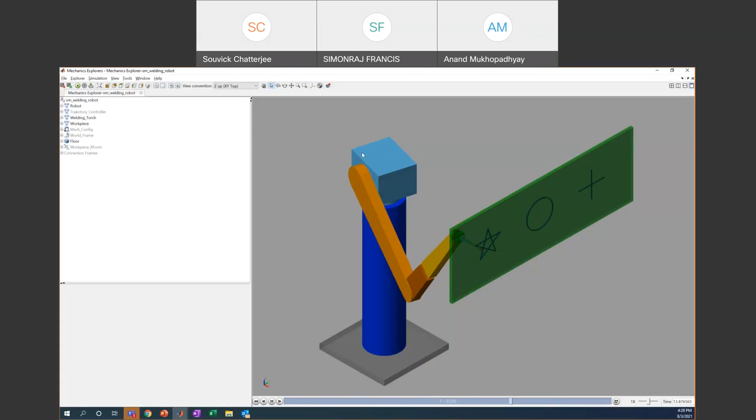So this is like one link, there is a revolute joint, there is another link, there is another revolute joint, this sort of thing. There are a bunch of different types of these. Once you get started, you will see there are a lot of different things, including one on the elevator front, which is also pretty nice.

Maybe I'll try to open up that. This elevator example is about modeling an elevator, and it will give you a belt and pulley mechanism, that way. Can we do virtuals? That basically boils down to this question that's been asked - can we do virtual simulation of robotic parts and joints?

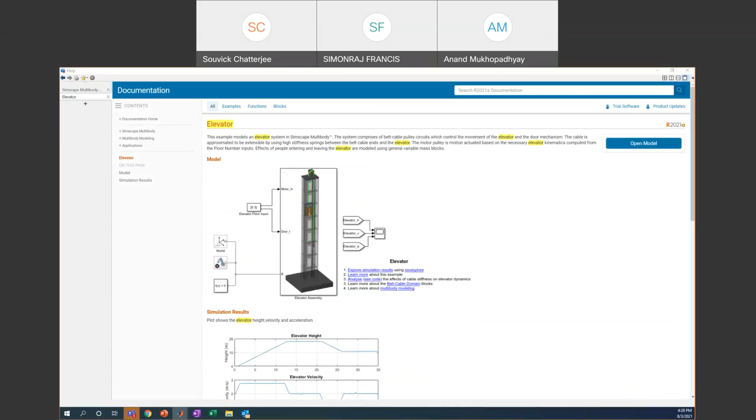And that's what we were doing here. We can do multiple other things in robotics - inverse kinematics, forward kinematics, simulation of different joints. The advantage is, when you have a robot with joints and want to integrate a motor to it, that's also very easy to do.

Now this one is also sort of a belt and pulley mechanism - it's like simulating an elevator. So this elevator is moving, and you can see these visualizations again, where this pulley is moving and this elevator is going. And the resolution of these videos - you can see people waiting on the fifth floor and they will come back to the third floor.

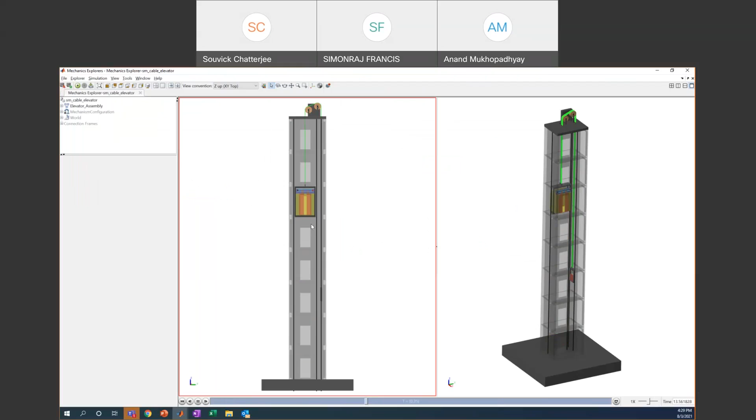That sort of thing can also be seen in the visualization. You'll see here people coming into the elevator and then they will be dropped on the third floor. These types of simulations can also be done - there are all these different types of things which we can do.

Now coming back to the question of CAD import - of course for these types of models, we don't recommend doing these drawings in Matlab or Simulink, because this becomes very difficult. If you have any CAD drawing, or any SolidWorks model, we can very easily import that into SimScape Multibody. The way to do that, I'll just show you one video.

For that, give me one second while I pull that up. So basically, once you are in SolidWorks, you need to install a SimScape Multibody plugin. Once we have that plugin, the idea is that it will take care of everything. So the way it operates, I'll just play this video.

So this is - oops, why is this? One second, somehow. Okay, so this is in the SolidWorks environment, right?

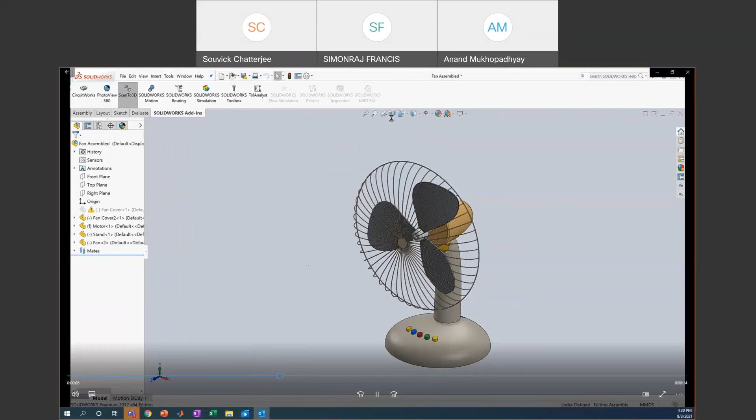So what we can do is, once you go to the tools and there is a SimScape Multibody link, then we click on export, and this entire model will be exported in XML format, any .xml format. All these parts will be imported to SimScape Multibody, and once it gets imported, you can very easily do any dynamic simulation in SimScape Multibody. That is very straightforward to do - something you can do pretty easily.

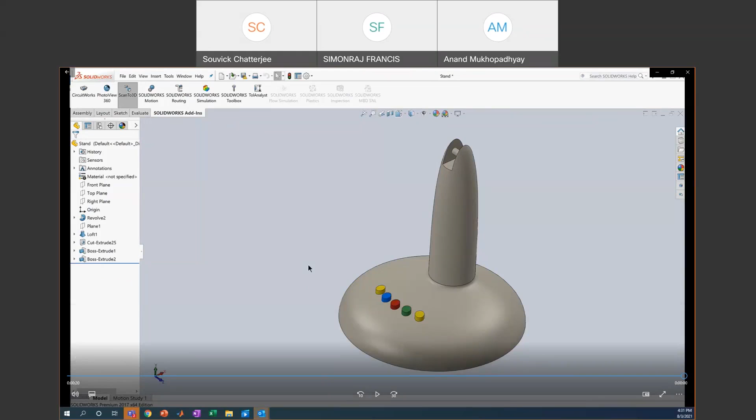Yeah, does that answer your question, sir, for the CAD modeling part and also the joints part for the robotics application? Once you get started, there are a bunch of different things - we can share a lot of different resources on robot modeling.

For robot modeling, we have a lot - it starts from integrating a DC motor with the joints, and then if you want to control it via a PID, and then finally if you want to deploy it to hardware, that's also possible very easily - controlling the hardware through a simulation. You can change parameters in Simulink and the hardware will change accordingly, so that becomes pretty easy to do. We have full-fledged demonstrations and slides on robotics which we can go to, but we are on the top of the hour.

But this is how you can get started. And then once you get started, once you do a lot of, we have a lot of courses, and I can pass on to Anand also to talk about those. So once you do those courses, it becomes easier to do about all these more involved problems.

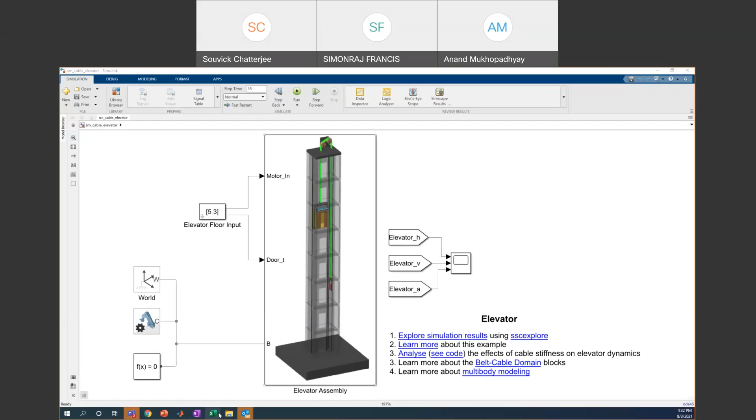Like this, we can do a lot of different things, as we can see here in the library browser. You can use any of these models, and it can go to something like aerodynamics, fluid mechanics, thermals, heat transfer, so all different concepts. It's a very powerful tool. Industries use it day in and day out, and students who graduate, if they have that skill, it becomes easier for them to get jobs as well. For different courses in different departments, there are multiple courses which we have created like this.

Any questions, any thoughts? So there was another question.

It was about wanting to do facts devices, especially StatCom, from a Triple E professor. So I posted a link related to power electronics facts in the chat window. Power electronics is another big area, so there are a lot of different things. We have a SimScape power electronics example, I think the fourth example, related to that StatCom. All these blocks are very crucial in power electronics as well, so please feel free to explore them. The link contains a lot of things, so feel free to look into that.

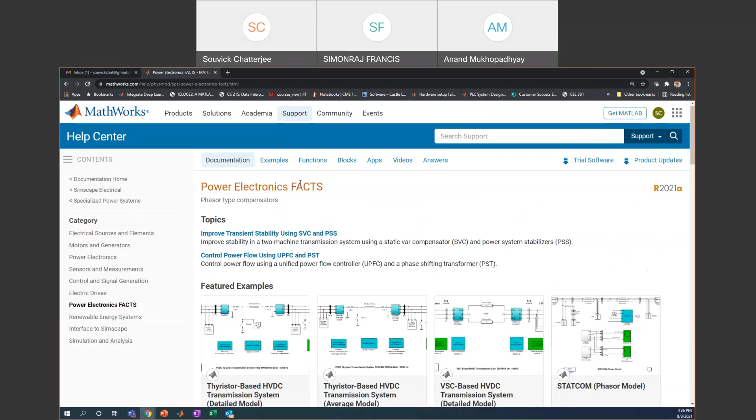I am posting everyone again here. Another thing for students, we have some predefined courses also which could be used as a part of your course, such as Simulink on ramp, Simscape on ramp, and also Stateflow on ramp. There are 3 on ramps. Let me just post those links as well.

Anand, do you want to share the screen and talk about those last part maybe while we wrap up? Okay, yeah, so I think again you have to make me the presenter. Oh, I have to, okay, then I will be able to do that. Yeah, let me share my screen once more.

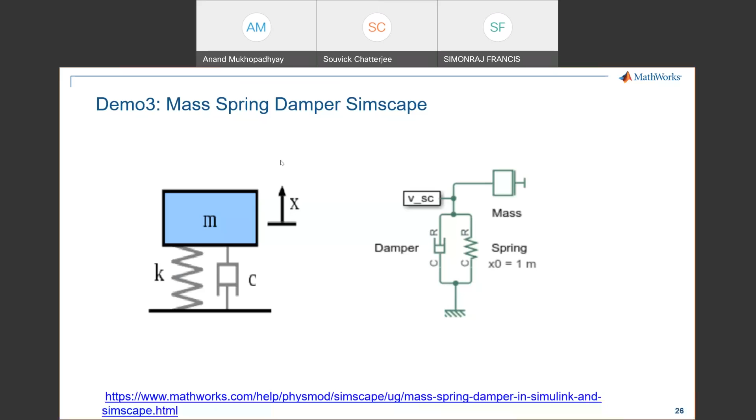So I was talking about these on ramps. It is in the same MathWorks Academy website where you can find these. The second one is Simscape on ramp. So after Simulink, if you do Simscape on ramp, you will get those things which are essential, like how you can connect a Simscape block with Simulink, what is solver configuration, and those things. That would be clear, and it's useful for those getting started to know about these things. Let me post it in the chat window so you can access it right away. We also have this Stateflow on ramp, which is in the same environment, where you are actually simulating different state machines.

Make a traffic light controller, switching on and off a cooling fan. Some algorithms you just assign certain states and connect it. So these are 3 separate on-ramps. You can use it for your courses, and relate it with examples specific to your courses. For example, if you're in mechanical, a mass spring damper example would be more relevant; for electrical, an electrical example would be more relevant.